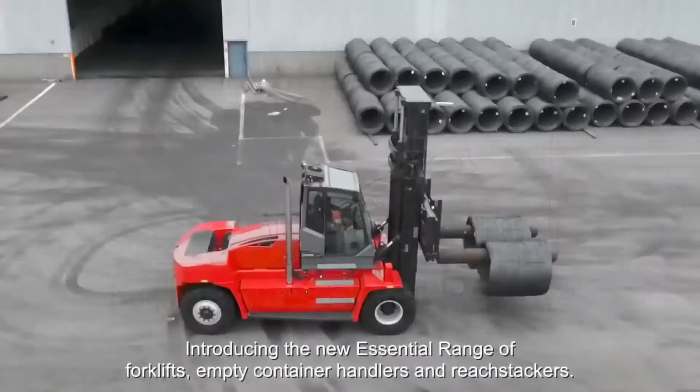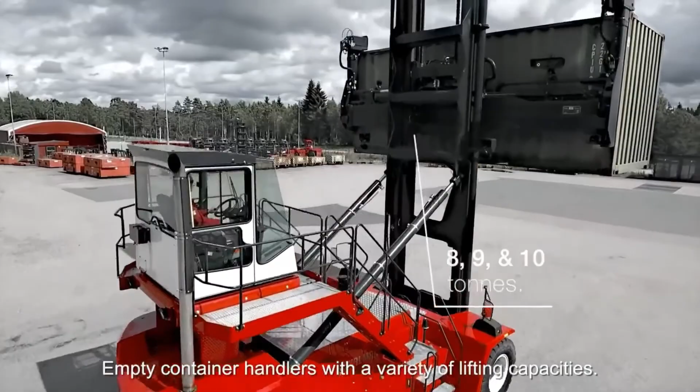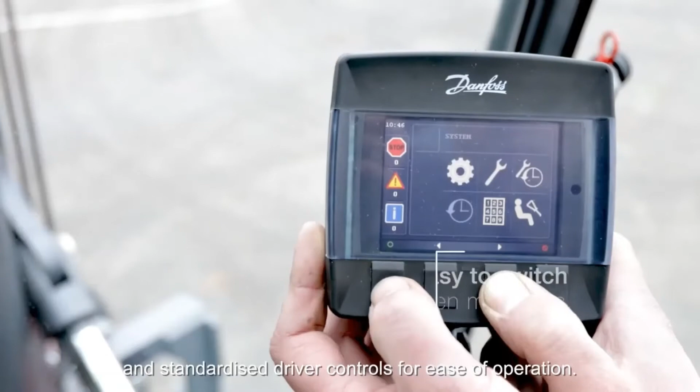Introducing the new essential range of forklifts, empty container handlers and reach stackers. They are reliable, robust and highly efficient. A range of forklifts optimized for steel, wood, paper and other heavy industrial material handling. Empty container handlers with a variety of lifting capacities and a reach stacker built for container handling.

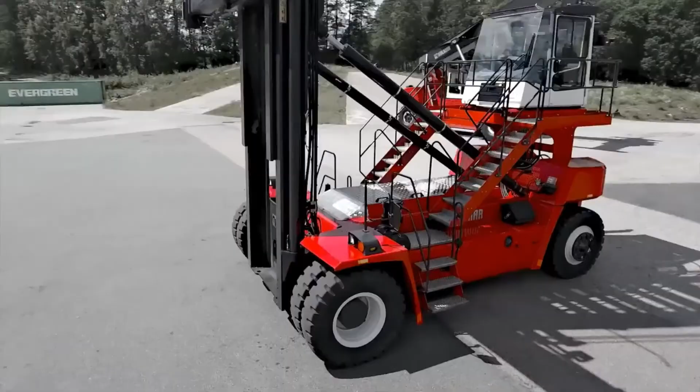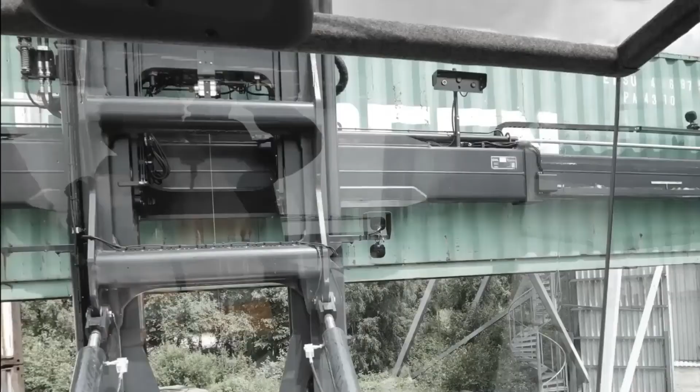They all have the same electrical system for quick troubleshooting and standardized driver controls for ease of operation. You will benefit from longer service intervals, and all service points are easily and safely accessible, making your machines quicker and cheaper to maintain. Plus, our new ergonomically designed essential cabins with non-slip access points, LED lights as standard, improved visibility and new joystick controls provide a highly productive, safe and comfortable work environment for your operators.

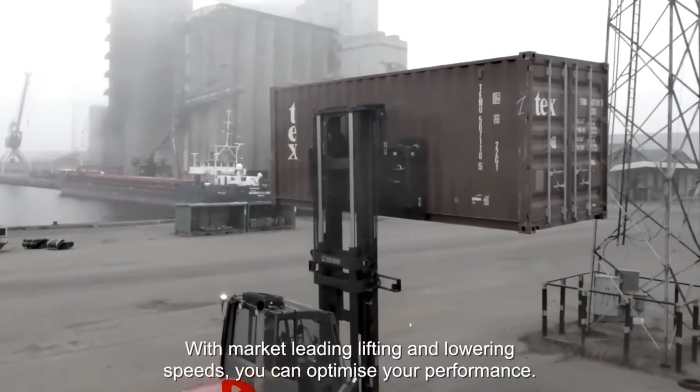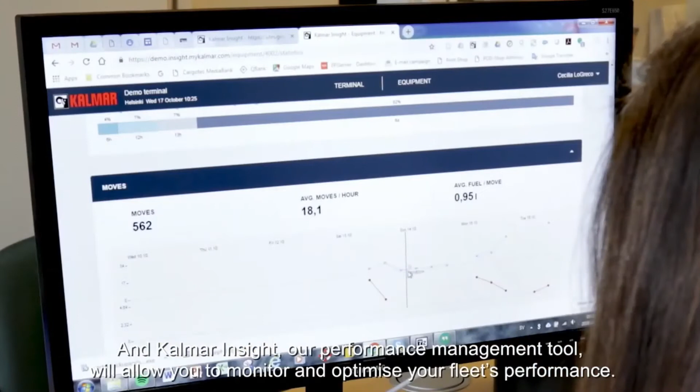With market-leading lifting and lowering speeds, you can optimize your performance. Kalmar Care offers a range of maintenance packages, and Kalmar Insight, our performance management tool, will allow you to monitor and optimize your fleet's performance. Our new essential range gives you everything you need from a Kalmar machine: quality, reliability and efficiency at a great price.

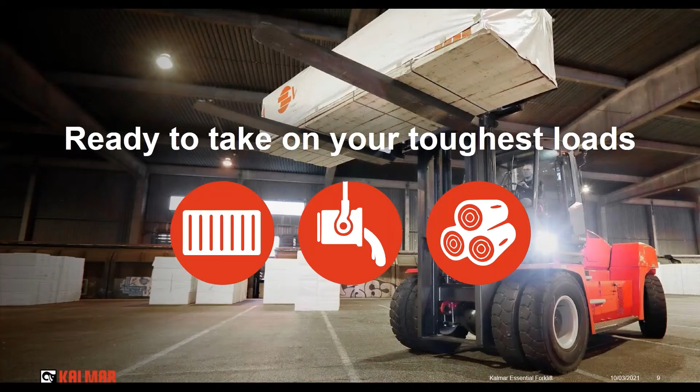So you get everything that you need on a Kalmar machine: quality, reliability, and efficiency at a great price. And we are ready to take on your toughest loads.

Kalmar's image has always been closely attached to the port industry. As we know, Kalmar is the leading brand in this sector. Plus, in the history of these forklift trucks, our image was very much improved and developed through this Ro-Ro forklift truck development. But we are also extremely well developed in industrial segments like metal, forestry, mining, and big distribution in regions like Europe, and we would like to bring this know-how to other regions.

As I mentioned, we have a really wide range of forklift trucks with different lifting capacities at different load centers, reaching on our standard machines from 5 to 72 tons, the highest capacities in the market right now. We divide this into three segments: light, from 5 to 9 tons, only an electric solution for our region; medium, from 9 to 18 tons; and heavy, from 18 to 72 tons.

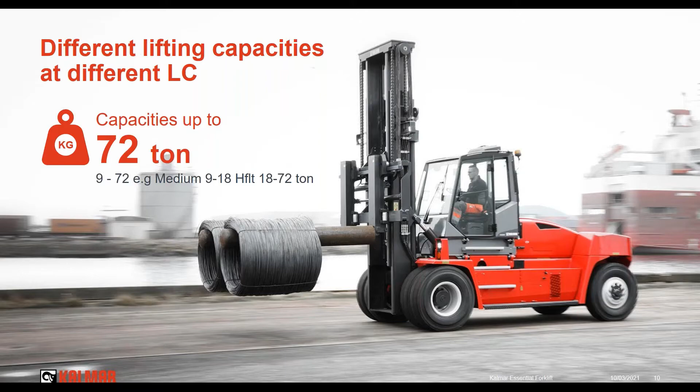Today we'll mainly focus on the medium and heavy range. Regarding medium forklifts, we have lifting capacities from 9 to 18 tons with different load centers and wheelbases. We have both electric and diesel versions available, and on this electric medium range up to 18 tons we were pioneers, and we still see that the market doesn't have much in terms of options to provide this kind of solution.

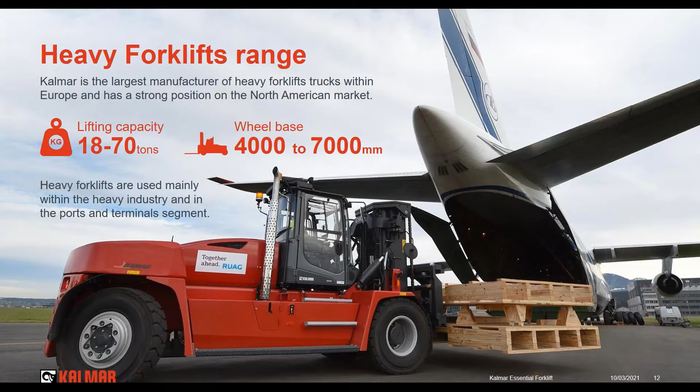Coming to our beautiful beasts, the heavy forklift range, I want to point out that Kalmar is the largest manufacturer of heavy forklift trucks within Europe today. We have lifting capacities between 18 to 70 tons and wheelbase from 4 to 7 meters, so we are really talking about big equipment here. Those are especially dedicated to heavy industry and to ports and terminal segments too. My colleague will show you a little bit more of this.

What I want to say about Kalmar's reliability and know-how in this kind of equipment is that it is built on a proven platform. We have over 30,000 units placed worldwide, with quality parts, an extremely robust chassis, standard driver interface, and a common electrical system. All this means you get a machine that is robust, which is extremely important, especially in some of our markets, like Africa where I work more closely. So robust, reliable, but also very easy to use and to maintain.

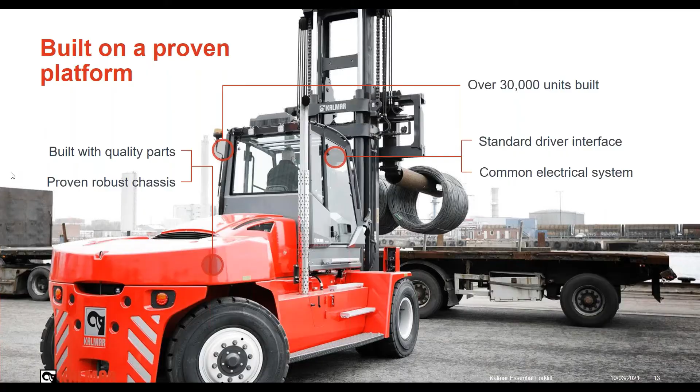As said, for Kalmar, safety is first. So all our machines are designed to help your operators work in a safe environment. Some points to consider: great visibility, with cabins designed ergonomically for optimized vision. We have second doors for emergencies. It is a machine perfectly counterbalanced, always with 3-point access and non-slipping surfaces.

But we have many others, like the automatic fire suppression system, for example, but we can discuss that anytime separately, as today we did not want to enter that much into detailed technical points.

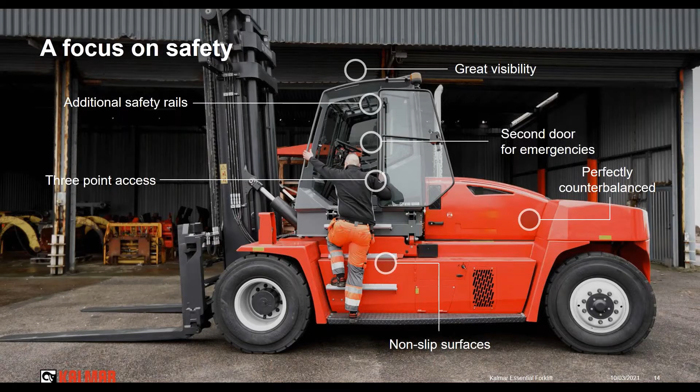So we were talking right now in the previous slide about safety, which in my opinion is a totally key point for your operations. But how important is the performance? Right now, Kalmar has the market-leading lifting and lowering speeds, and at the same time one of the lowest fuel consumptions. So it doesn't matter which your operations are, because once we find the proper solution for you, after all the discussions and understanding perfectly how your daily work is going, you know you will be with the correct partner.

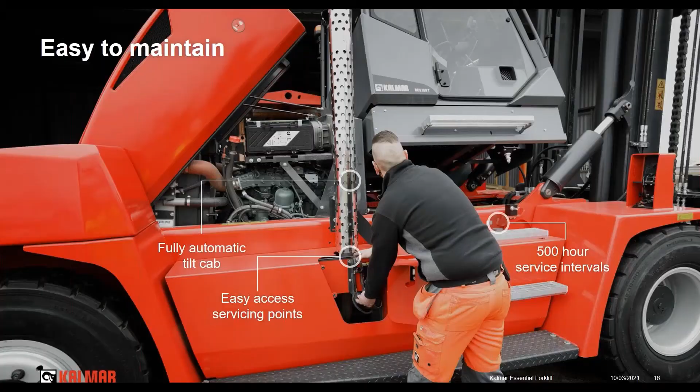For me, one of the most interesting points is also how easy it is to maintain the machine, and this I have experienced very much. In my territories, where sometimes the know-how and expertise of the local teams is not the highest, the machine has been designed to simplify interventions, with quick and easy access servicing points like a fully tilted cab, or long service intervals, to keep maximum availability and reduce the TCO, the total cost of ownership, on your machines. But let me come back to this a little bit more on the next slide.

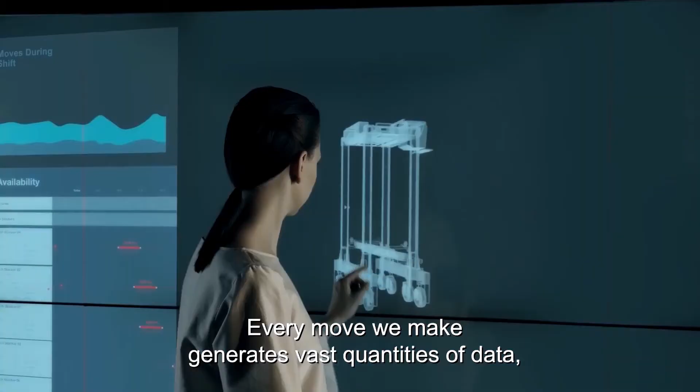Our world is evolving at an unforeseen rate. A new level of interconnectivity means that today, everything is connected. Every move we make generates vast quantities of data, and ever-advancing technology will improve the way we perform.

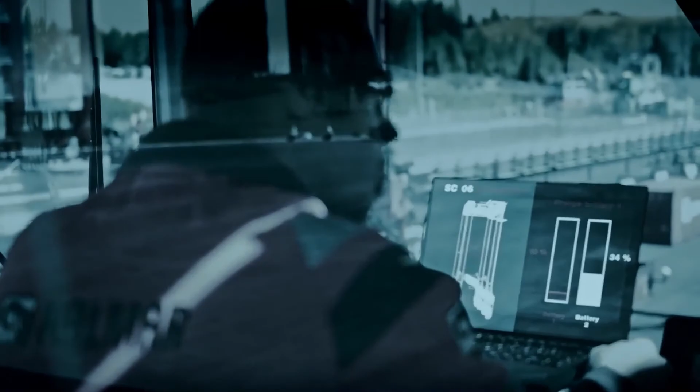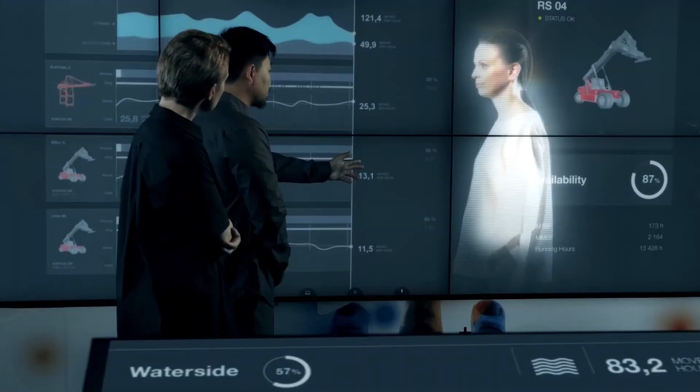In this sense, the future is full of potential. We can access virtually all the data in the world, but we don't know how to harness its potential to the fullest. This is where our biggest challenge lies: how to turn big data into actionable knowledge.

Kalmar combines and makes sense of relevant data from your equipment fleet, terminal operating system and maintenance management systems, giving manual terminals the operational management benefits just like an automated terminal. This comes down to a single powerful tool. We call it Kalmar Insight.

Kalmar Insight is our initiative to create a holistic solution that measures and helps improve terminal productivity. Kalmar Insight provides instant insight into terminal operations by turning data into actionable information that can simplify your operational decision making.

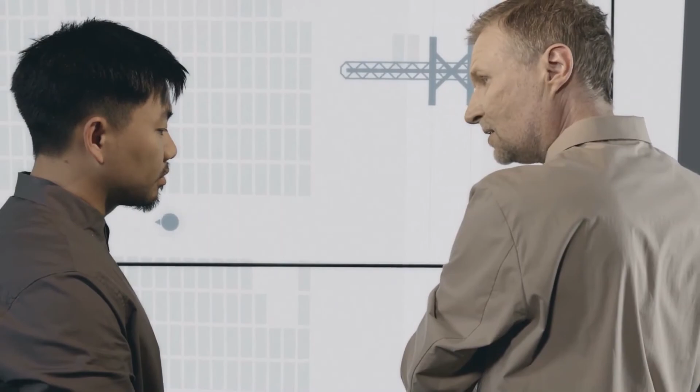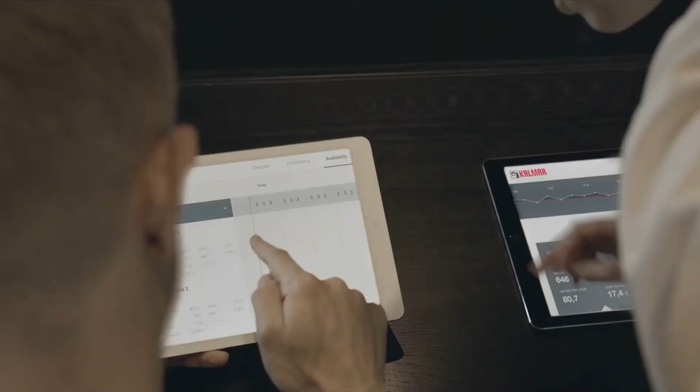With Kalmar Insight, historical data can be added to real-time data to build a complete picture of your operations. So you can take instant actions by removing productivity bottlenecks and schedule equipment maintenance to ensure operational readiness.

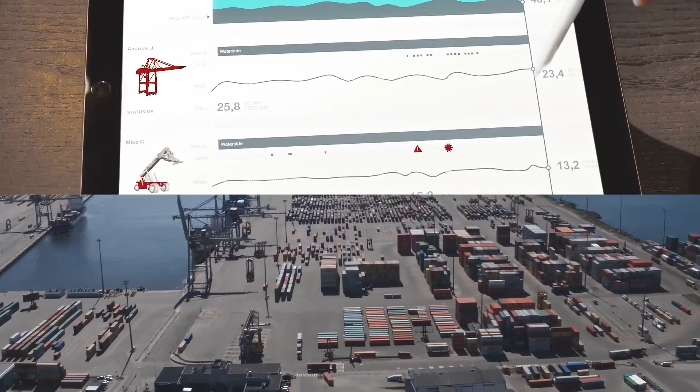Now, world-class productivity is attainable for your terminal. We know you don't need more data. You need to be able to make sense of it. You need Kalmar Insight.

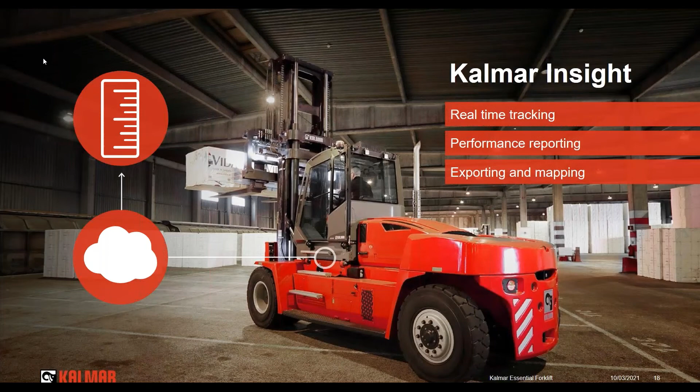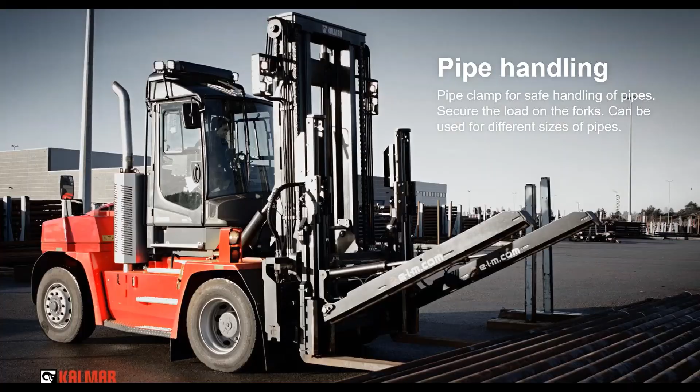Yes, thank you, Alejandro. I will try to take over from here, and I think we can take the next slide, Alina. I will show you a few examples of customer cases here, how we can support you in your specific operation. We start with the first slide, an example of a forklift equipped with a load stabilizer, a pipe clamp as we call it as well.

This attachment will secure the load on the forks and prevent the pipes from rolling off. This application can be used for all types of pipes, of course, metal, casting, plastic, etc., and most dimensions. So please, next.

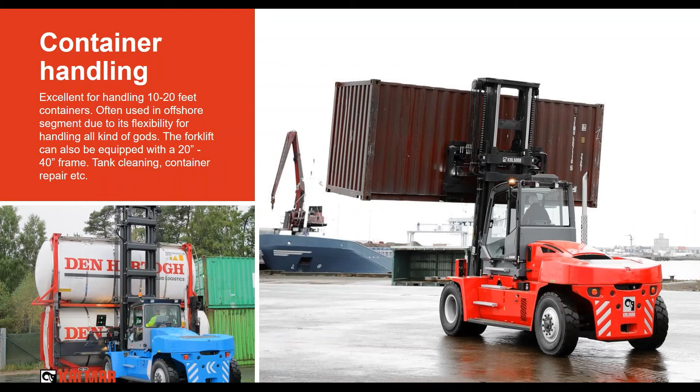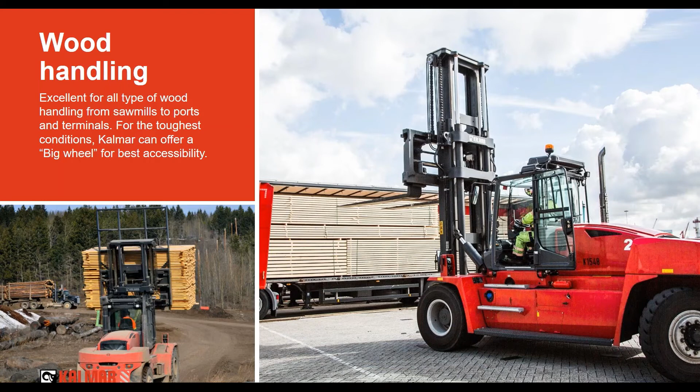Wood handling is another segment. We offer a number of options depending on type of handling, everything from sawmill to stevedoring in ports and terminals. For the roughest conditions, we can offer a big wheel with excellent traction for even the toughest ground conditions.

One of the biggest challenges is the metal industry. Very warm environment, hot splashing metal, liquid metal and dust puts many challenges to a forklift. Kalmar has a very long history and cooperation with the steel and aluminium industries. We have developed a number of options to supply this segment.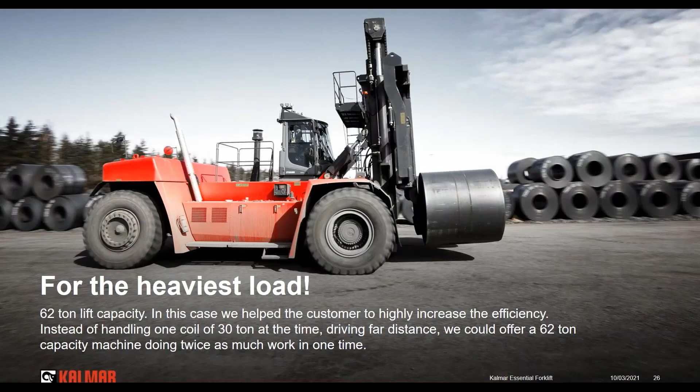For the heaviest loads, this is an example where Kalmar was challenged by a customer to increase their productivity in coil handling. The result was a forklift capable of, instead of handling one 30-ton coil at a time, now handling two 30-ton coils at the same time.

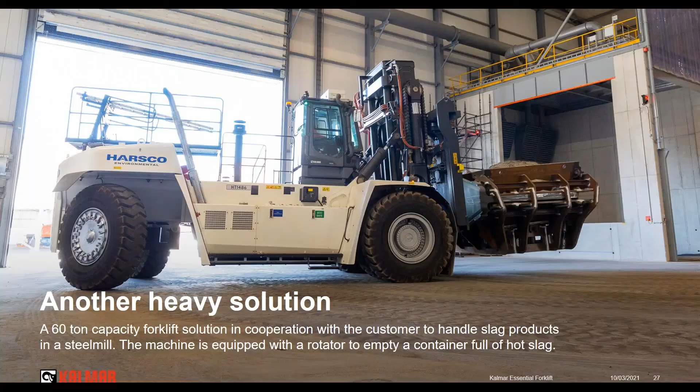And we end up with the customer cases here. With this case, Kalmar was able to assist the customer in their logistics. Together with the customer, we designed a new, more flexible solution for slag handling. We replaced the present fleet of special pot carriers with a more flexible solution with a 60-ton forklift with a rotator.

I hope with this very short introduction of our customer cases here that we can be able to inspire you to contact either our Kalmar dealers or our sales office for more information on how we together can support you in your demands.

So a small summary of the presentation of this webinar that we have gone through. Kalmar Forklift has a range of offers where we offer quality, reliability and efficiency at a great price. Many attachment options fulfill the special needs of different segments and industries, meaning we can supply a complete machine, including attachment, for your type of operation.